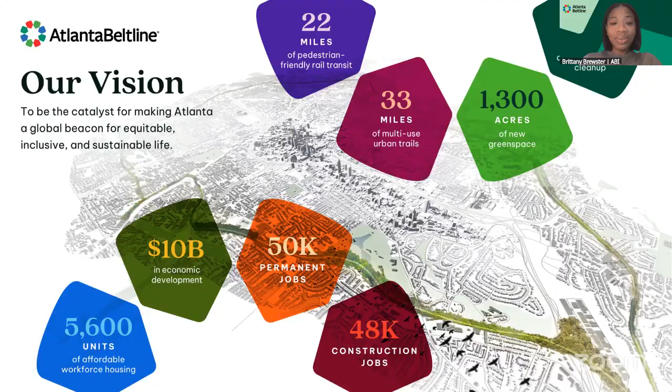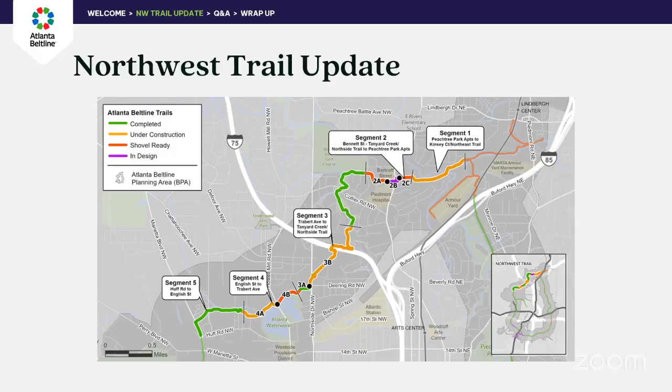Thank you very much, Brittany. So tonight, as the title of the presentation says, we're here to talk about segments 3 and 4, but also we're here to talk about Bennett Street demo at the same time. But in order to talk about that, what I thought we would do, because it has been a while since we've been together, is I thought I'd give you a tour of the Northwest Corridor, because there's a lot of activity going on in the Northwest Corridor. I'm also going to go over it segment by segment, and then we're going to go over it in detail.

So let's just talk about the Northwest Corridor on this map that you have in front of you. I always start going west to east when we're talking about this, it's just a habit. The Northwest Corridor is made up of 5 segments, and a couple of the segments are subdivided into different parts, and I'll explain why that is as we're going through the presentation.

But if I start over on the west end of the Northwest Corridor, we start with segment 5, which basically runs from Huff Road over through Blandtown over to English and Culpepper. That section is now open, and I hope everybody on the call that's in that area has had an opportunity to ride that section. It's fantastic. We're glad that that one is open.

And then we move over, as we move towards the east, we go to segment 4. Segment 4 is subdivided into two pieces, 4A and 4B. Today under construction is 4A, and 4B is soon to come. It's shovel ready, and I've got some more detail on the schedule there.

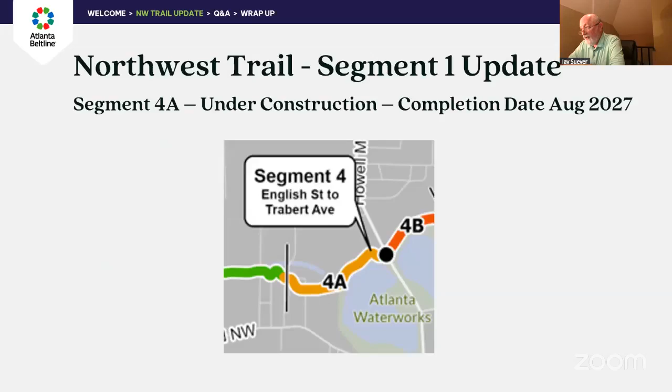So the first one we want to talk about, we're going to go over the ones that are under construction, because I know everybody likes to see the construction photos. So we're going to go over segment 4A first, which is under construction with a completion date of August of 2027. This goes through Blandtown. It comes out of English Street, comes across, and goes to the north side of the waterworks, and ends at the Howell Mill intersection.

So as you can see, even though we have a completion date of August of next year, there is actually a significant amount of trail already poured on this section. What you're seeing in these two images is the section over on what I call the west side of the CSX tracks, which is the Blandtown side of the corridor. We've almost connected English all the way up to Boyd.

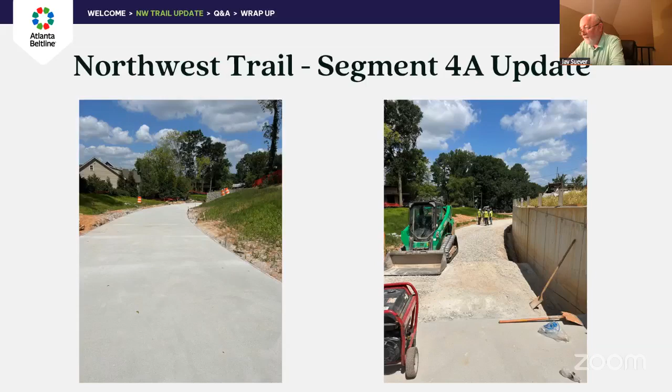This is the English to Boyd section. What we're hoping to be able to do is open up this block of trail. It's a short little section, but if it's done and we've got the cameras, lights and everything ready, we're going to go ahead and open it. We hope that this little section here will be open in the next month to 45 days.

Once you cross over Boyd, what we have to be able to do, on the left-hand image, is start elevating the trail in order to get up and over the top of the CSX rail line. What you're seeing in this image is the columns that are already in place. This image is actually a little dated because the columns are now exposed and have all the formwork off. We have to put steel on top of these, and then the bridge that crosses over the CSX rail line will go off the two columns in the background and connect over to the dam at the waterworks.

The image on the right is over at the waterworks. If you look at that image, on the right-hand side is the dam structure for the reservoir. We've already got the trail poured there. You wouldn't know that because it's all in secured areas inside the City of Atlanta Public Works area. The dam is on the right and Fleet Service is on the left. So we've already made progress on this side of the trail as well.

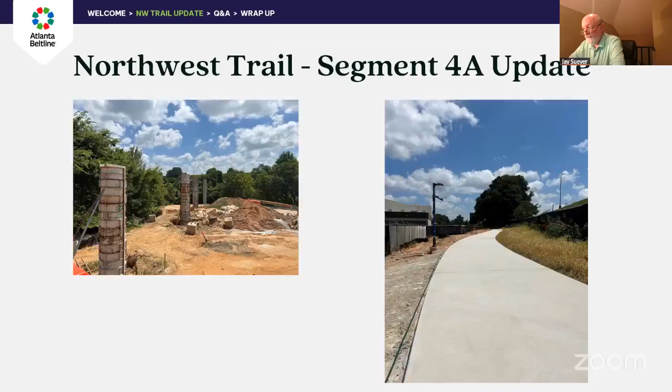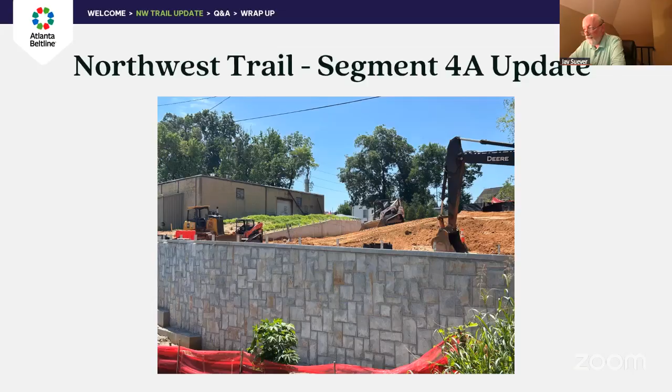This is one final image of the 4A section. This is when you come out of Northwest 5 at English and start up the hill to get to Boyd. You can see that the walls are finished, and the wall in the background already has stone on it now. Rails are up, light poles and cameras are installed. So we're very close to doing fine grading and finishing up the trail. We'll have this cleaned up. This is the section I was saying we're hoping to open up in the next 30 to 45 days.

All right, we're going to jump over to 3B. 3B comes out on the west side of Northside Drive. We cross over Northside Drive with a long truss bridge, and end up near Northside Circle. We spin down, cross through the Atlanta Technology Center, go underneath 75, parallel 75 going east until we hit the culvert, and then we go in the culvert till we get up to the green area, which is Ardmore Park.

These are just some quick images of what I took yesterday. We're in the ATC area right now, the Atlanta Technology Center. What you're seeing in these images is we're starting to do traffic control, and we're starting to do investigation, making sure that we see all the utilities before we get in here and start digging. Silt fences started up today, and if you live in this area on Northside, you'll start to see people coming to take down trees for the trail starting next week.

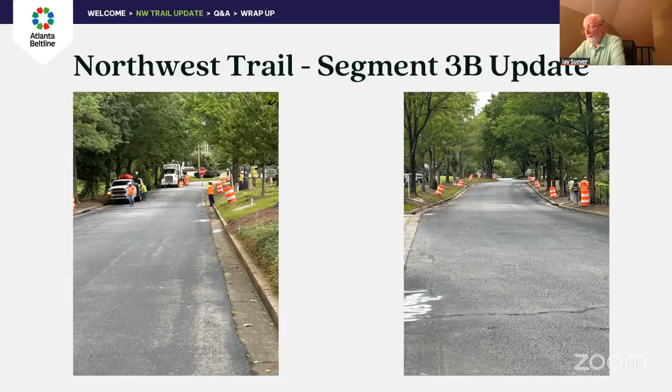All right, now we're moving to segment 1, which is another segment that's under construction. This is the segment that runs from the bottom of the hill at Peachtree Park Drive. I call this the tale of two sections because it has the section that runs through Peachtree Park Apartments, which is on the left, crosses over the creek, and then you have the section in Peachtree Hills over to Kinsey Court on the other side of the creek, on the north side of the creek. The section that runs through the apartment complex is complete.

And we're working on the section that crosses over the bridge and into Kinsey Court. That's currently under construction with a completion date of June of 2028. Next slide, please.

It's all landscaped. The lights and cameras are working. So it's a small section that connects back to Peachtree Creek. This is open for use. Next slide, please.

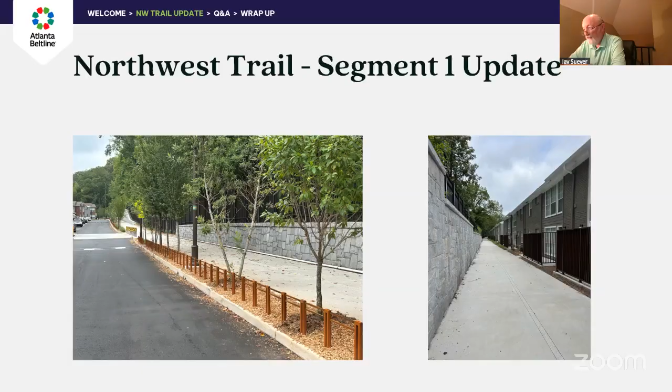So one of the reasons - and I'm sure there are people on this call over in Peachtree Hills who've seen the work not progress very much in this area lately - is that when we put the bridge up, we built the bridge and poured the deck, and the bridge did not perform the way that we wanted it to perform, or the way it was designed to perform.

Through a forensic analysis of what happened, we've determined that the bridge currently up there - we've already dismantled about half of it - we're going to take the rest of it down and rebuild the bridge using all brand new materials. We've hired an engineering firm that specializes in these cable bridges to do this work with us.

And we should be back under construction. We're going to dismantle it starting in August. It should be completely dismantled by November, and at that time we'll be rebuilding the bridge.

We can't, unfortunately, build the elevated section that runs over to Kinsey Court till the bridge is in place, because we have to get to the bridge. That's one of the reasons why the completion date has pushed out.

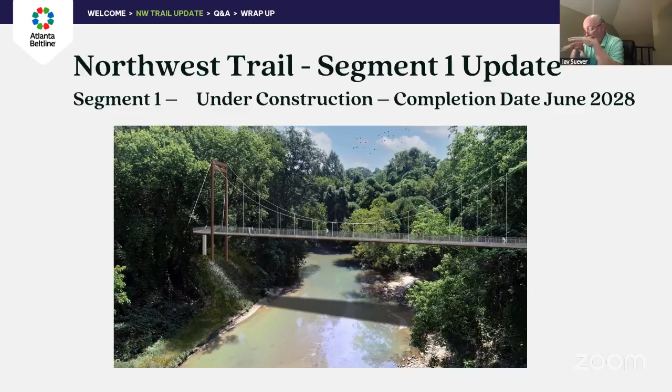I do want to mention, however, that the June 2028 date does marry a little bit better with the Northeast 3 section that's out for bid now, so hopefully things will start to align there. I still think this section will finish before Northeast 3, but that's one of the reasons why we are where we are. Next slide, please.

Okay, and then finally, we're going to jump back to segment 2, but we're going to talk about Bennett Street demo. So you probably know, or maybe you don't, that Atlanta Beltline bought large parcels here on Bennett Street over the last 12 months.

What we're planning on doing: the buildings - the nightclub is up there on Peachtree Street, and there are several more buildings back here, I think a total of 6 - we're planning on demolishing those buildings. They've become a public nuisance.

We want to clean this area up for the businesses at the back of Bennett Street, as well as all the neighbors. So our intent is to start demo of this in September of 2026, and it'll take about 120 days to demolish these buildings. The intent is to demolish them and get the sites clean and graded.

The other component of this is that GDOT needs the land where the nightclub sits in order to stage the bridge replacement at Peachtree Street, so we need to get that building out of their way as well.

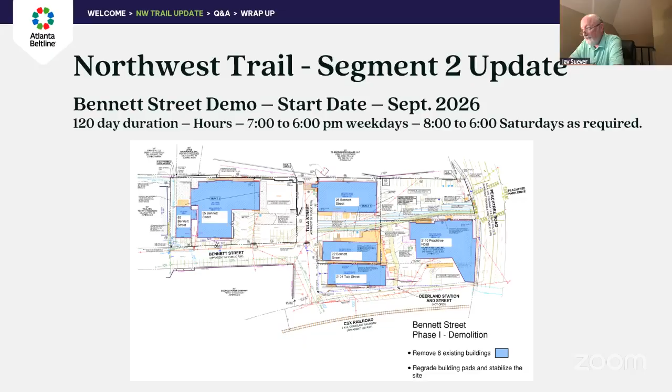So this is my last slide. One of the things we're doing - I mentioned earlier that the 2A section, from Bobby Jones up to Bennett Street, is out for bid, and the bid opening is next week. We plan on starting that section in September. That's the piece in yellow on the left-hand side.

We recognize that if we just built this section to where the yellow is, people would still be trying to get to the other side of Peachtree Street. So while GDOT is working on the bridge for the next 2.5 years, we're going to realign Bennett Street with Peachtree Park Drive and build in a pedestrian sequence into that light, then create a side path up to Peachtree Street with a little plaza on the corner, so you can cross over Peachtree Street and connect back down to 2C.

Ultimately, we're still planning to go south at the end of the yellow and cross under Peachtree Street - that will be the permanent condition. But in the interim, we need to make that connection across Peachtree Street safe, because people will want to use it. I believe that is my last slide.

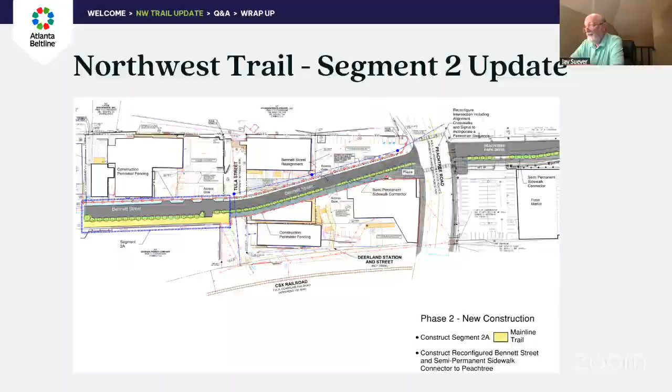Yes, I think so as well. Thank you, Jay, you provided such clarity with your updates tonight. So definitely thank you, and guys, we've got to the Q&A portion of tonight's meeting.

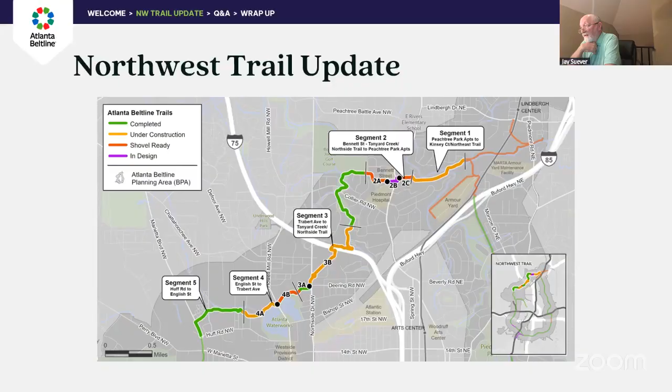I don't know where that would be, to be honest with you. If it is, I don't see that in the plans. There's nothing on 3A or 3B that has a large or decent sized green space. I will tell you that the spin down area north of Northside Circle is a green area, but I can't think of another area. And no additional parking - we don't add parking when we're doing the Beltline. It's kind of the antithesis of what we're trying to achieve. So there will be none there.

Okay, Jay, so stay with me down there. We're going to answer Jason's question: are there any plans or renderings on what the trail crossing under 75 will look like? Yeah, there is.

If that question is asked and I'm not able to answer it, when we produce answers to questions we don't get to, I can attach a rendering of what that looks like. We do have that. I'll leave that one open so we can address it after the presentation concludes.

From Bruce: kudos to the plan to provide a temporary crossing at Peachtree and Bennett awaiting GDOT bridge construction. Brilliant, much appreciated. I guess that was just a shout out.

Miss Catherine Montgomery, we're back at you. Where Section 3B is being built along the concrete channel of Tanyard Creek, there are significant cracks and gaps in that channel. Is the Beltline working with watershed management to have the channel repaired before the trail is constructed?

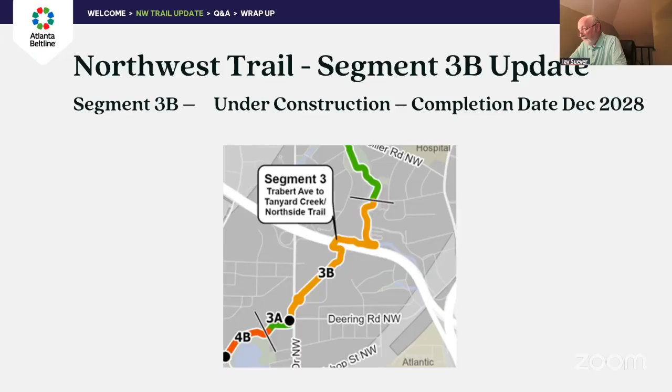I'd have to figure out where Whitehall Court is to be able to answer that, but I don't really know of an issue. We've done the trail and there's just not a lot of noise associated with it. So let's leave that one open so I can see exactly where it is we're talking about, and I'll get back with Scott on it. That sounds good, thank you.

Okay, so we can address this one. I know my colleague wants to tackle Mary's question again on Section 2B. You didn't answer the timing question regarding the new buildings—when would the new buildings be built? Should the expectation be that it won't happen until after 2030?

Thanks for bringing that up again, Mary. Sam talked about the sub-area 7 piece to that, and what would follow would be the master planning process. But as Sam mentioned, we don't have our housing and development team on the line, and I'm not myself familiar with that timeline, so I couldn't speculate whether it would happen before or after 2030. Happy if you want to send a follow-up email to the engage inbox—if we have a timeline, we can certainly provide that from our housing and policy team.

Nathan, I can also add context to that. As I said during the presentation, GDOT is using our land south of Bennett Street for laydown area and construction purposes for that bridge, and the GDOT schedule for that bridge goes out to the middle of 2029. That might give you a clue as to timing. Although sometimes we do phase our developments too, so that's good context, Jay.